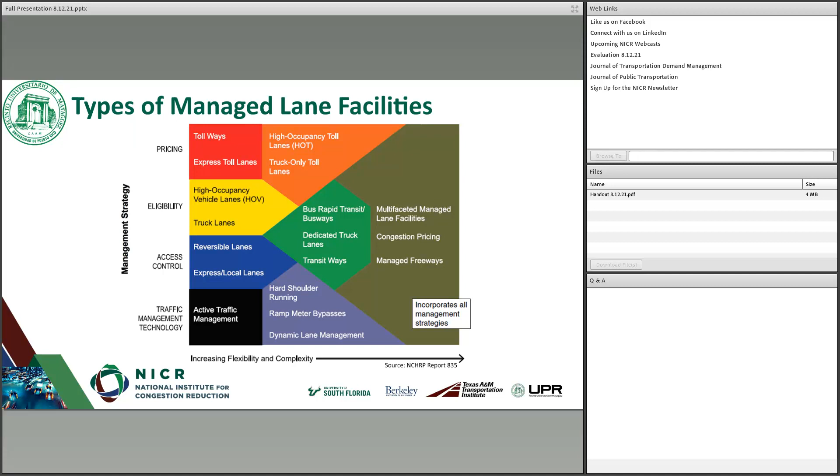In the case of Puerto Rico 22, Freeway 22, you can consider that as a multifaceted facility, because it includes express lanes, a reversible operation, and also it has a dynamic pricing mechanism. And an additional characteristic is that it is shared with a busway. So you can see we have four of the elements on that figure that is presented from the NCHRP Report 835 about managed lanes. So the Puerto Rico 22 managed lane facility has some characteristics that make the possibility of having a complex operation on it.

Basically, managed lanes have two different variable pricing mechanisms that are being used: either time of day or dynamic pricing. Of these two primary pricing methods for managed lanes on freeways, the time of day provides predetermined toll rates based on historical traffic flow patterns. Obviously, they are predictable, easy to understand for the users. But on the negative side, it does not react to real-time traffic conditions or incidents that might happen on the street. Basically, you have set the price of the facility before the start of operations.

In the case of the dynamic pricing, you can now have strategically located sensors that collect real-time traffic data and apply an algorithm to estimate flow parameters, either based on densities or on speed, and that adjusts the price that the user will have to pay for the use of the facility. Obviously, it has more flexibility because it can handle those fluctuations in traffic from day to day. But on the negative side, you can think that it's a black box, especially the pricing algorithm, something that enters data and exits a price. So in some cases, the algorithm basically is not available, and obviously there is the higher cost for the implementation of the technology, the sensors, and the data collection, so it has a higher price for the facility.

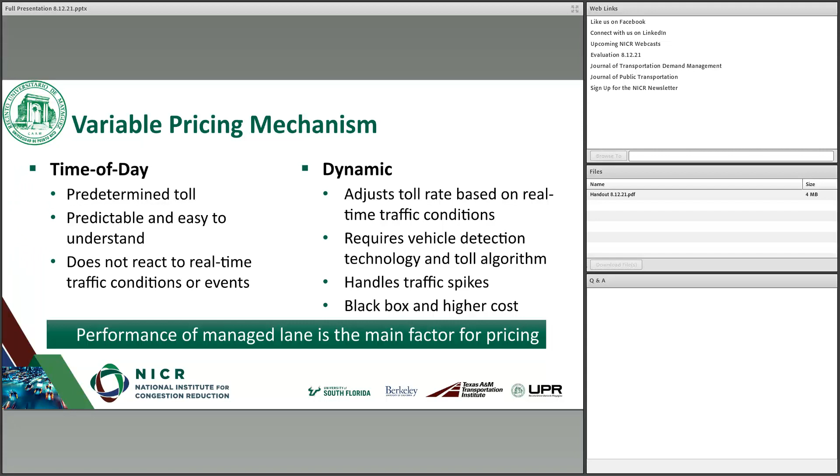No matter the type of mechanism, obviously the performance of the managed lane is the main factor for setting up those prices. So basically, the objective of this project at the NICR level was to compare different facilities to detect if either of those mechanisms has an advantage over the other. In our case for Puerto Rico, we also included the need for the case study, being that the PR22 was the first managed lane with a dynamic pricing mechanism established in Puerto Rico. So we wanted to look at the user frequency, preference, and opinions about the DTL. So we expanded a little bit the objective that we had with the project from NICR, and that's basically what I'm going to show you today.

Dr. Burris had a previous webinar some months ago, and he presented the results from 6 different managed lane facilities. This one will be like a 7th facility, and at the end, I will show you a table comparing some of those results. So let me talk a little bit about the Jose de Diego Freeway PR22 dynamic toll lane, so you can understand the basic operation of the facility. The PR22 dynamic toll lanes are located in the San Juan metropolitan area of Puerto Rico. Puerto Rico is located in the Caribbean Sea next to the Dominican Republic.

But as you can see from the TTI Urban Mobility Report, the San Juan area has a lot of congestion. Congestion has significantly increased from 8 hours of delay in 1982 to 58 hours in 2017. So that's a 625% increase. That's huge. When you compare with other urban cities in the US, the San Juan metropolitan area has higher values of delay than Cleveland, Indianapolis, Cincinnati, Minneapolis, and even Las Vegas. So the San Juan metropolitan area is ranked in the top positions in terms of metrics related to congestion. For example, we are number 4 in terms of planning time index, number 15 in terms of travel time index. So in Puerto Rico, they decided on this corridor, PR22, that is located on the north side of the island.

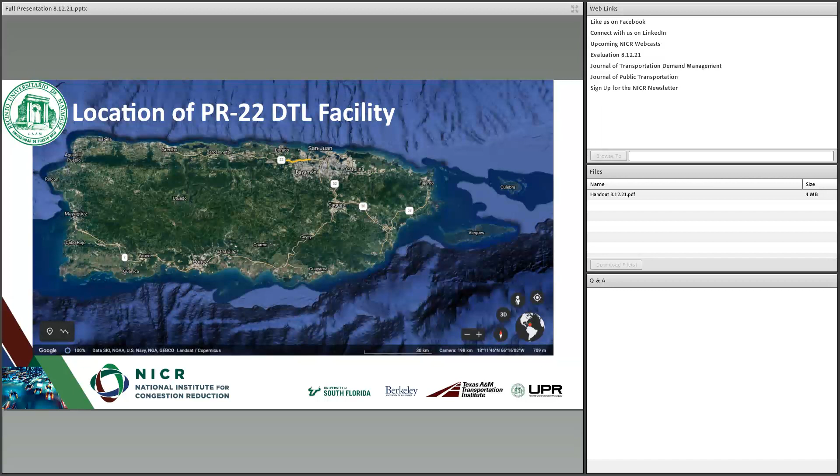And you can see a photograph of already in the San Juan area, a little bit patriotic, right? You see the flag of Puerto Rico, and looking at the congestion, everyday congestion at the commuter time in the morning. So you can see it's eight lanes all the way, four in each direction, and heavily traveled. This is stop and go conditions, so you don't have any flow at all. It's just stop and go almost every morning.

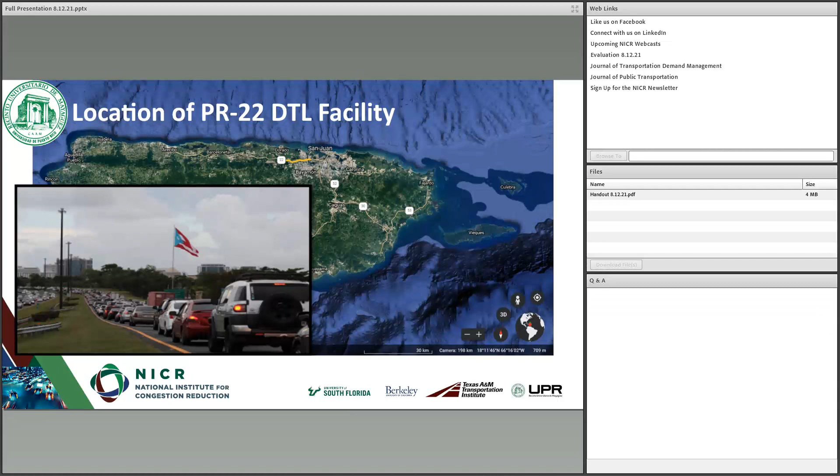So obviously we wanted to look at the efficiency of this facility. The facility has 2 median lanes, and it's a reversible operation, going towards San Juan in the morning, exiting San Juan in the afternoon. Another characteristic that makes PR22 an interesting case is the toll pricing.

Like I said, the dynamic toll lanes have variable toll rates that go from 1.70 as a minimum to 4.95 as a maximum value. The pricing mechanism is based on the speeds on the median lanes. So they have used 55 miles per hour as the threshold for changing the rate of the tolls in the dynamic toll lanes every 5 minutes.

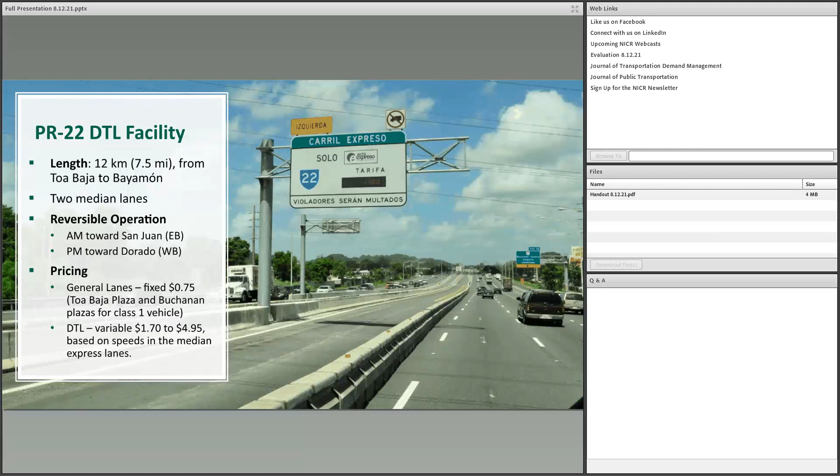But as you can see, the regular lanes also have a toll. In this case, it's a fixed toll, but on the same corridor, you have the DTL with a variable pricing mechanism, and you have the regular lanes or the general lanes with a fixed toll of 75 cents. So you can see that the users of the freeway are already paying for the use of the facility, and they have to pay a premium if they want to enter the median lanes to access the express lanes on the facility. So that makes for an interesting case of how the user decides to use or not the DTL.

And you can see here a plan view of the configuration. I'm not going to get into more details on this one, but in the morning operation, we have 2 entry points, and then you have 2 exit points in the morning going towards San Juan. They use movable concrete barriers to create 1 lane, especially at the end. This one, you can see that they extend the dynamic toll lanes to have a second exit going towards San Juan.

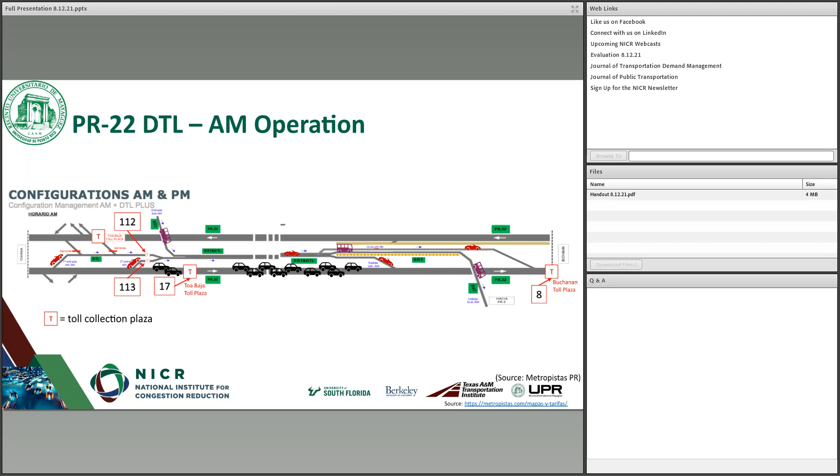But as you can see, the regular lanes also have toll stations inside the DTL corridor and after the DTL corridor. So this is a complete corridor that has a toll scheme that people obviously are used to. And also, like I said, it has a busway that connects through the DTL to the DTL corridor as well.

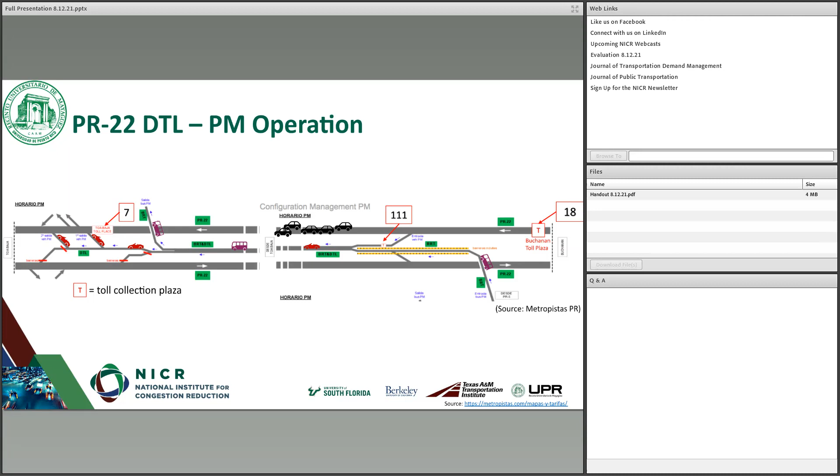And during the afternoon, obviously the operation is reversed, but it has differences. As you can see, the east side doesn't have the extension. In this case, all the regular lanes come in and enter. You have one entry point and two exit points going out of San Juan. And you can see as well that the busway operates inside the DTL in the flow of congestion, and then it returns back using the regular lanes in the other direction. Okay, so this is just to give you a sense of what the corridor looks like. Obviously, those are the details at the moment.

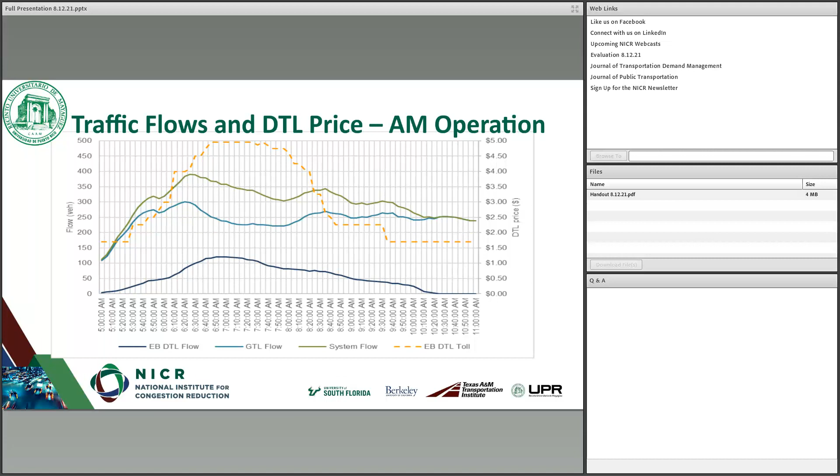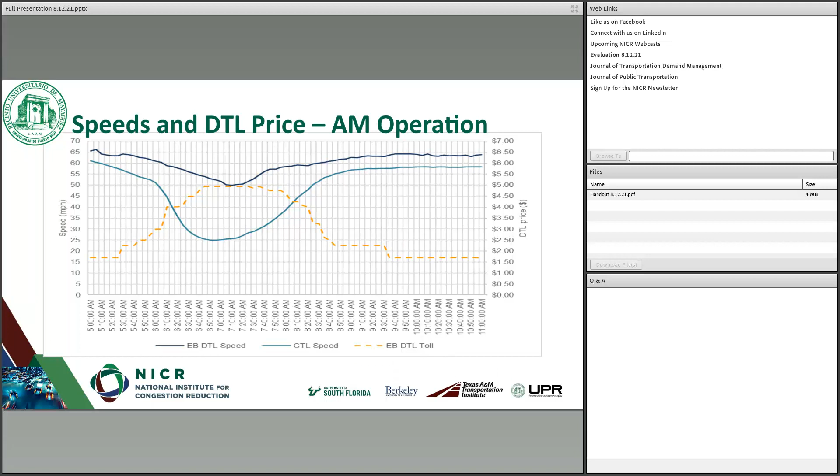So as you can see, speed is one of the performance measures that we need to use to evaluate the performance of the managed lane facility. One limitation that we had on the study is that we only could estimate speed for the morning operation. We didn't have data to collect or analyze speeds on the PM operation. So I'm going to show you only the traffic flows in the afternoon.

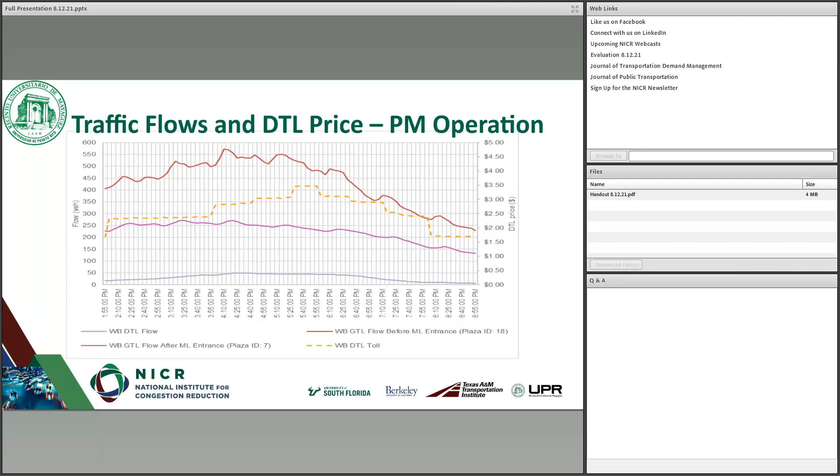Another interesting issue is that the maximum price is not reached on average. As you can see, it doesn't reach the 4.95 when you see the data grouped for the whole year. So that means that on some days, the pricing of the dynamic toll lanes doesn't reach the 4.95.

So we are going to talk now a little bit about the economic measures that we collected in the project. For this we used a survey. We conducted a survey from October to November, and the purpose was to get information about the use and frequency of the DTL, and we performed this online. So this is an online survey with a 4% survey error.

We received 518 responses. In terms of the sample, the average age was 45 years old. We had about the same quantity of male and female, more or less distributed equally. And 65% of the sample either work or study in a municipality near the PR-22 corridor. And 76% of those that answered the survey stated that they have used the DTL before.

So that gave us a good impression that our sample was representative of actual users of the freeway and the DTL. So with that, I'm going to show you some of those responses in the survey. We asked them what was the stated moment when they decided to use the DTL.

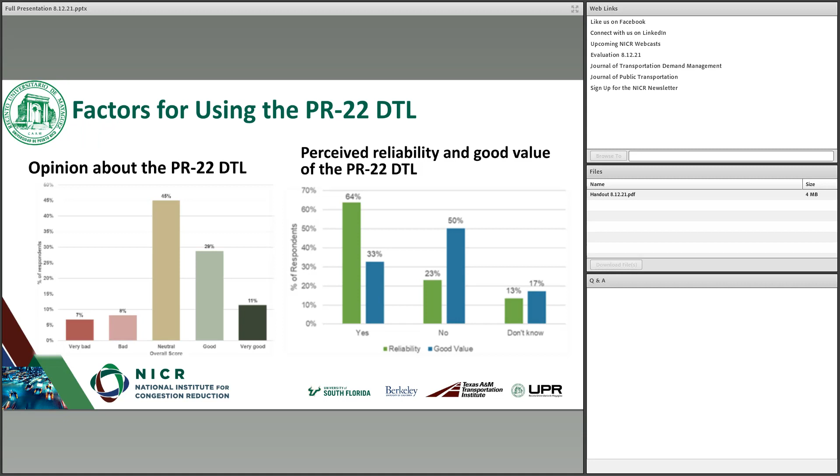You can see that they understand that the DTL is reliable, but half of them don't think that it's a good value. So the premium that they pay, they don't feel that it provides enough utility for their trip. So now you can see there's a little bit of contradiction on their part, which is natural when you talk about survey responses, but it also talks about their willingness to pay for the use of the facility. So that's why we decided to include in the survey a willingness to pay assessment.

We use 2 different methods. One is called the Van Westendorp price sensitivity meter that uses 4 questions to ask people to establish at which price they believe the facility, in this case, or the good that is being consumed, is too cheap, cheap, expensive, or too expensive.

Okay. The other method that we used were stated preference scenarios. We show them variations of travel time savings and toll price and ask them if she or he will use the DTL. So in that case it was just a yes or no question.

Obviously, I don't have time to go into the details of how these results are calculated, but the four prices that each respondent provides are plotted against each other. And the intersections of those graphs are used to establish the willingness to pay, a range of the willingness to pay of those respondents.

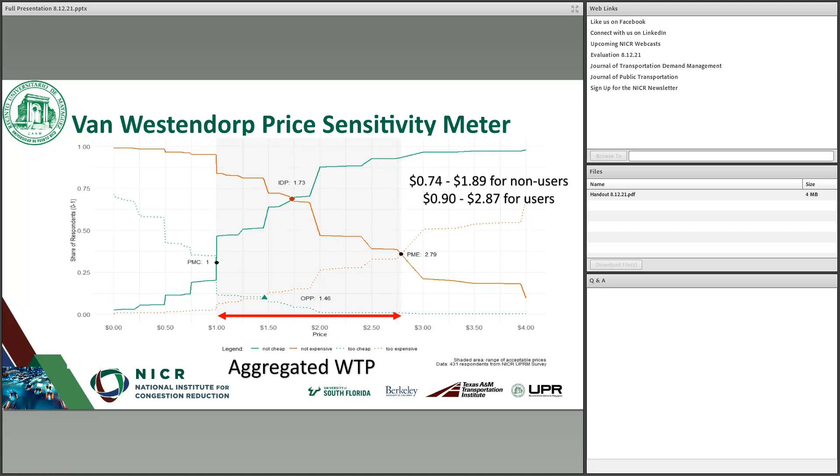And also, the higher the age group, except those who are 65 years old, the higher the willingness to pay. But the people who are retired have lower willingness to pay. If you are retired, in most cases you don't have the pressure to get to a job. So they don't have that willingness to pay.

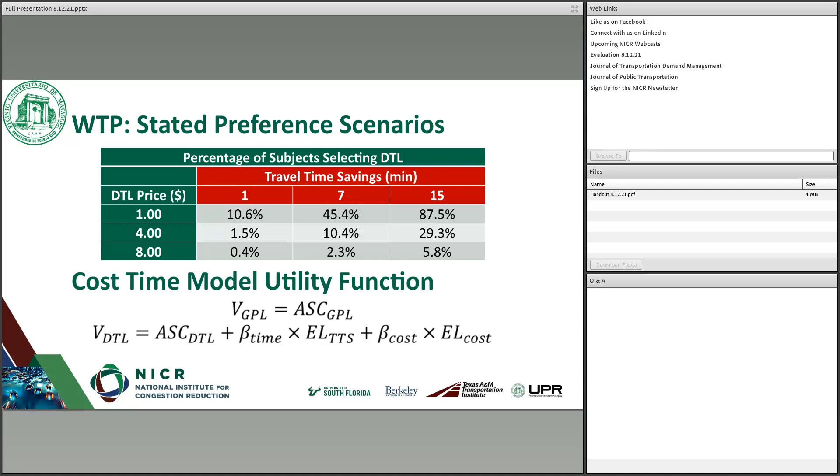The other analysis, the willingness to pay based on the stated preference, included 3 prices and 3 travel time savings. The table shows you the percentage of people who select the DTL, and there are no surprises. The scenarios with higher travel time savings and lower DTL price had higher percentage of selections. But we used this information to calibrate a utility function, and that's the result I want to show you. We had 2 calibrations, a base model only with cost and travel time, and another full model with all the socio-demographic characteristics.

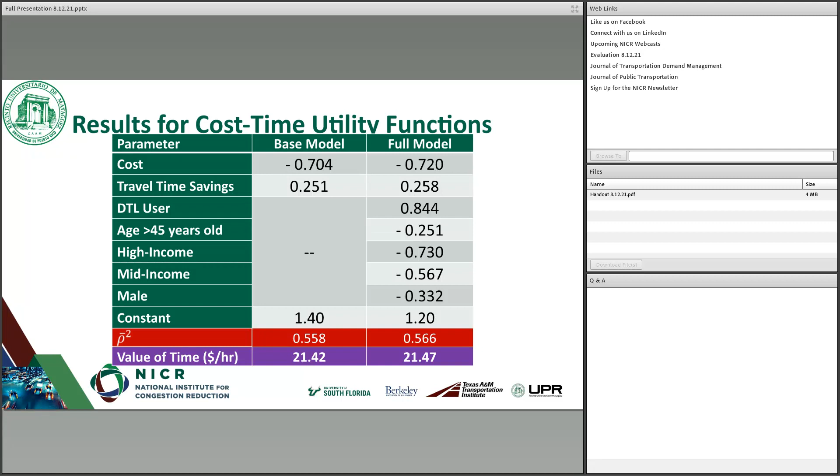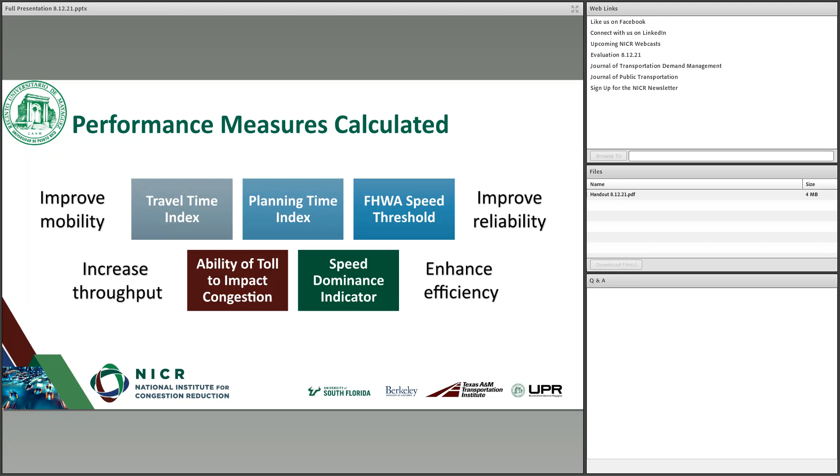So I'm getting to the end of my presentation. I'm going to show you the performance metrics we collected for the DTL using the toll transaction data. We calculated 5 metrics: travel time index, planning time index, and speed threshold using the Federal Highway criteria. And we had 2 different metrics proposed in this project: one called the ability of toll to impact congestion, proposed by Dr. Burris from Texas A&M, and the speed dominance indicator, proposed by Dr. Rodriguez from our team. The other metrics are common.

The TTI is a calculation used for the Urban Mobility Report, defined as the ratio of travel time conditions in the peak period to a target. Our target was the free flow. In the case of San Juan, TTI is 1.3. So you can calculate travel time and then calculate the difference between the general toll lanes and the dynamic toll lanes to get the savings.

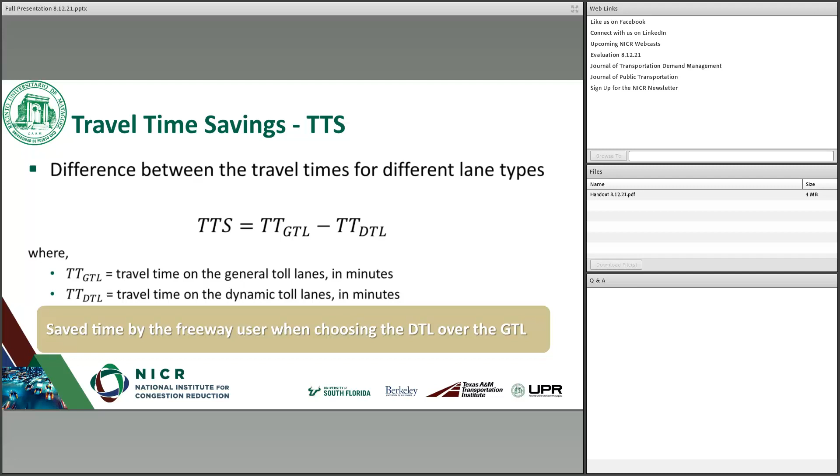And that's the saved time by the freeway user when they decide to use the DTL. So the results for the morning operation: as this is a metric based on speed, we only have results for the morning operation. As you can see, there are obvious benefits in travel times when you use the DTL. Obviously, that's as expected, but we are confirming that when you compare the travel time during the peak hour, you can see a difference of about 7 minutes between the general lanes and the DTL.

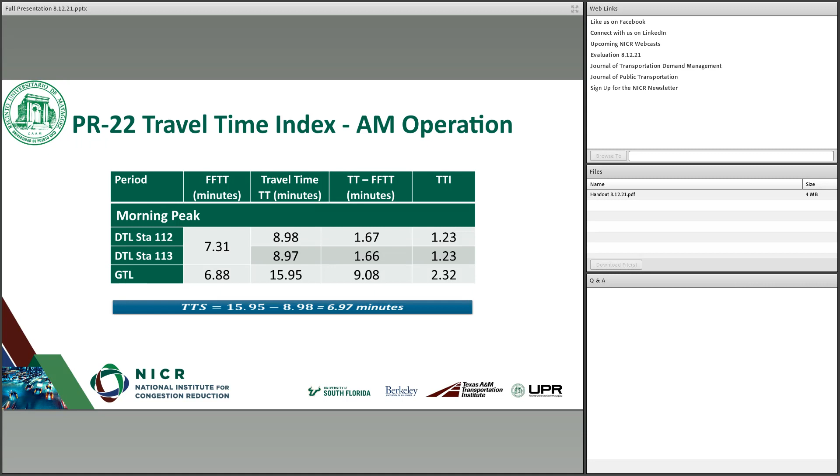But when you see the difference in travel times based on the TTI, you almost see that the TTI for the general lanes is almost twice that of the DTL. So obviously the pricing algorithm is working as desired by not allowing the trip quality to degrade in the DTL as much as in the general lane. So you can see that in terms of travel time, the DTL has benefits over the general toll lanes, and that's expected. But when we talk about the reliability of those results, that's when the planning time index comes in.

You have the calculation on the screen based on the 95th percentile travel time. And now you take the ratio against the free flow. In that case, for San Juan, it is 2.5, the entire general region. And then you can calculate the difference between PTIs, between general lanes and dynamic toll lanes, and get the benefit. So when we see the results, again, we confirm that the DTL is providing a huge benefit in reliability of travel time to the users.

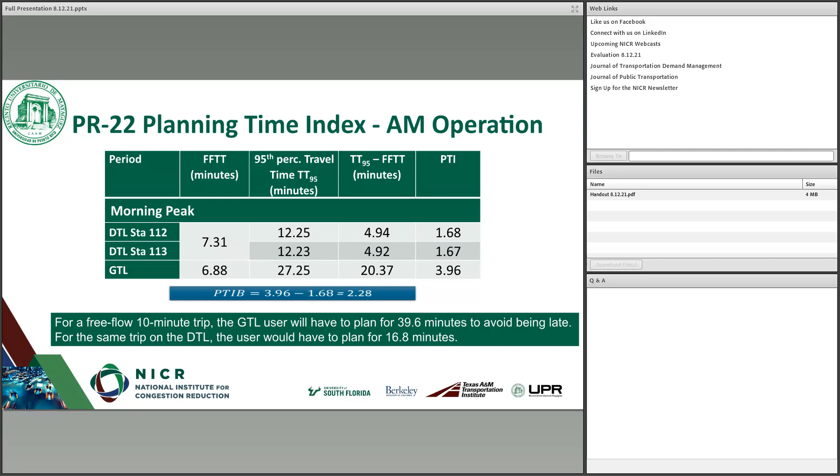So now you can see the 95th percentile of travel time: 12 minutes for the DTL, 27 minutes for the general lanes. So you have a difference of about 15 minutes in the morning peak. And when you see the difference in the PTI, the benefit is 2.28. So basically, the reliability is improved by 22 minutes. And you see the example for a 10-minute trip, the difference in how much the user will have to plan to avoid being late at least one time in a month. So the DTL is providing benefits in travel time and in the reliability of that travel time estimate. So those two are shown in the results.

In the case of ATIC, ability of toll to impact congestion, it is basically a computation of elasticity. It talks about the effects of congestion when balanced by the increase in the toll price. So when you see the results of the ATIC, you divide it by periods. In our case, we decided to calculate ATIC separately for the increasing and decreasing traffic flow periods. We calculated for the entire period and we saw the same effect, but we wanted to see if there was a difference when the traffic was increasing versus when it was decreasing in the morning.

The results are consistent for the morning operation, that the period when the price is from $3 to $3.99 has a negative ATIC value. That means that the price of the dynamic toll lane is affecting the decision of people using the facility. So it has a negative effect of people not entering the DTL in the same proportion as the increase in the price. In the afternoon, you can see that the increasing period is not the same as the decreasing period.

In the increasing period in the afternoon, the negative value comes at about $4 to $4.99, which is the maximum period. And you can see that at that price position, the ATIC value becomes negative. So the price is having the effect that you desire: you increase the price, so people don't go into the DTL as much and degrade the conditions on the DTL. So you can see when the price is affecting the perception of the user, and proportionally people decide not to use it.

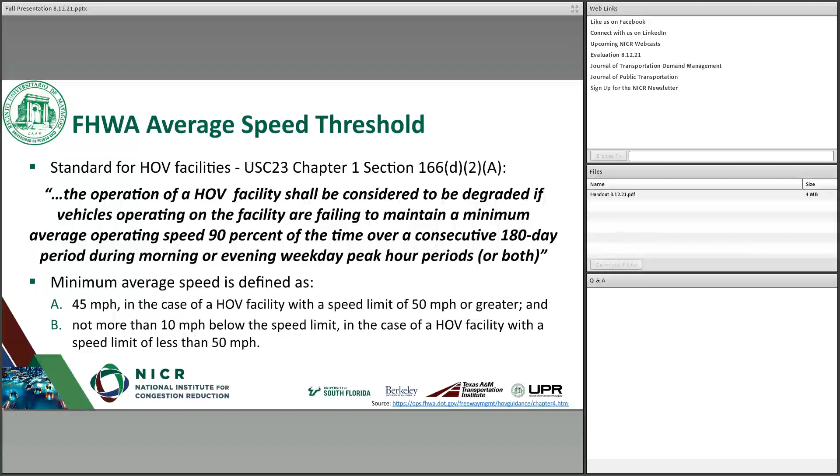So if you have 50 miles per hour or larger, the threshold is 45 miles per hour. If you have a lower speed limit than 50, then you have to go to 10 miles below the speed limit. So when you try to analyze the Puerto Rico DTL using those concepts, it becomes a little bit confusing.

You can have the speeds compared from the general lanes to the managed lanes in 5-minute periods, and you can detect when the DTL has lower speeds than the general lanes, which obviously would be contradictory to the purpose of the higher travel benefits. But when we saw case A, using 45 miles per hour and ignoring the speed limit on the DTL, the threshold is not met. So more than 90% of the time, the speed on the DTL is lower than 45 miles per hour. So based on those rules, it won't follow the criteria.

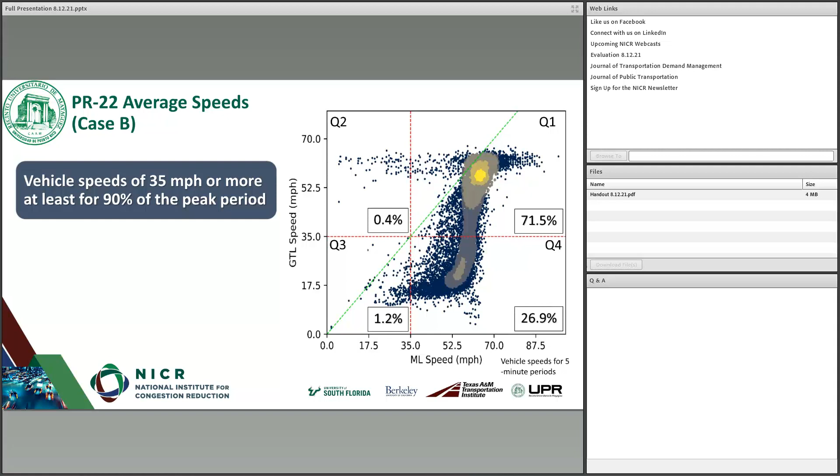Obviously, like I said, for the DTL, the speed limit is 45. So the correct way of analyzing the threshold is using 35 miles per hour. And in this case, with a lower speed limit, the DTL behaves as the criteria established. So you won't see a problem if you ignore the fact that the speed limit on the general lanes is higher than the DTL. So that's why I mentioned it's a little bit of controversy using this metric.

And the last one, I know I'm reaching the end of the presentation, is the speed dominance indicator. This is proposed as part of the project using the dominance theory. To tell you in a quick note, it's just a calculation of the product between the traffic speed and the flow. So if you take the flow and the speed and you multiply it for the general lanes and for the DTL, you will have that calculation and you can establish 2 points, one for the general lanes and one for the managed lane. And obviously you can take the difference like it's stated in the equation.

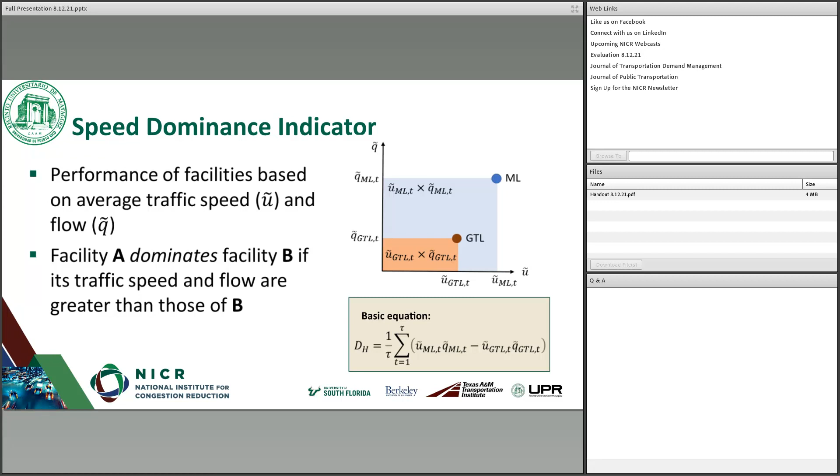With that, you get a perception of when the throughput multiplied by the speed is higher in the managed lane, providing you better performance. So you combine speed with flow in this metric. When you do that for the entire year, you will have a graphic like this one. This is grouped in 5-minute intervals. When you have positive values for this indicator, that means that the dynamic lanes are dominating the general lanes. When you see a negative value, it means that the general lanes are dominating the dynamic lanes. Obviously, what would you like to see? You would like to see positive values.

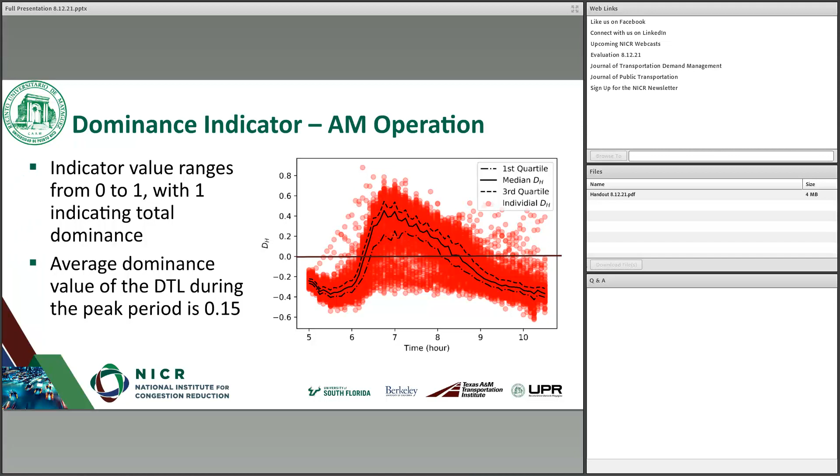So you can see that during the peak hour, from about 6 a.m. through 8:30 in the morning, the DTL dominates the general lane. So it provides a better output in terms of the product of flow and speeds than the general lane. So again, during the peak hour, the DTL is doing the work that is expected. During off-peak, you can see that the benefit of using the DTL is not really that obvious. People are using it, but they are probably not improving as much as during the peak hour, and that's expected, and that's the actual performance that you're looking for at a dynamic toll lane.

So in conclusion, when we analyze the data, the most important factors that people stated for choosing the DTL were the congestion level on the general lanes, the travel time savings, and the urgency of the trip as well. And although the DTL was perceived as a reliable option for faster trips, there is a disagreement with how good a value the facility is providing for its price. And that was confirmed with the willingness to pay, the stated responses on the survey, and you can see it from the actual traffic flow patterns.

And like I said, the willingness to pay estimated for the dynamic toll lane is lower than the maximum toll rate. So that comes into a question of how much you can pay for the dynamic toll lane, and the equity factor, which we didn't analyze in this project, and how it becomes an issue with the users. And that's something that we should take a look at in future projects.

In terms of comparison, I will complete my presentation with this. We went back to the results of some of the performance measures that Dr. Burris calculated in his part of the project. He analyzed 6 different facilities, and I'm going to show you, just for review, 3 of the factors or metrics. Obviously, there were other metrics that were calculated, but I'm just focusing on these 3.

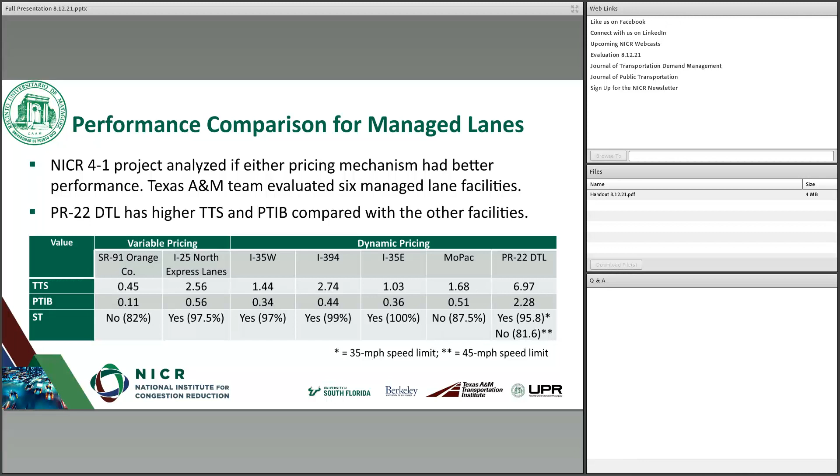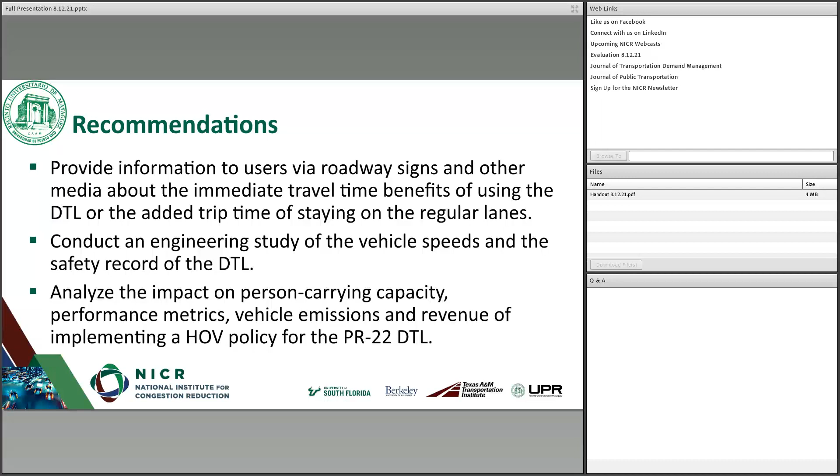So in terms of recommendations, they are more local. I believe that providing more information to users using roadway signs can improve the capacity of people using the DTL. The issue with the speeds on the Puerto Rico DTL has to be studied to see if those speed limits are related to any safety issue that can be improved. And also, Puerto Rico doesn't have a high occupancy vehicle policy. Maybe a future project might be to study the possible impact on the person-carrying capacity of the DTL if we include an HOV policy for the facility or the freeways in general in Puerto Rico.